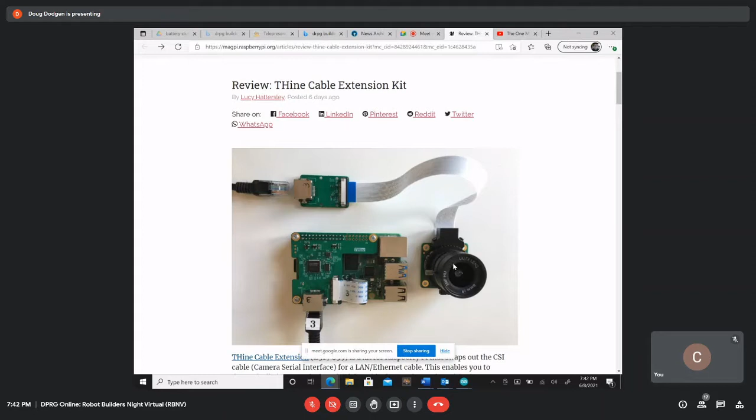I want to show this review of the THine cable extension kit. This is from the Raspberry Pi magazine, and it shows this cable attached to a camera. The whole point of this is that the camera can be 20 meters away from the Pi, in case you have some outdoor setup and don't want to put all the stuff by the camera.

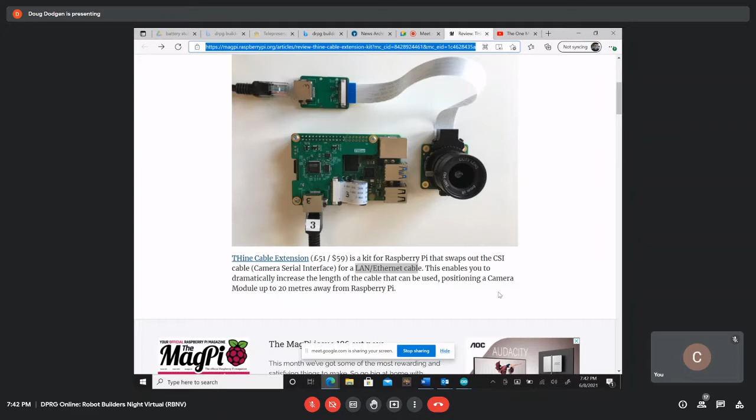Is that a PoE interface? It doesn't say that, it's a THine interface. What they do is have proprietary boards that turn it into a Cat5 network cable for transmission. See this here, LAN cable? That's kind of odd, I haven't heard of that standard. Maybe it's something similar to PoE since it has to provide power, and that camera takes a considerable amount of power. They're not showing an external hookup in the example I looked at, but I thought it might be something you'd want to double check.

THine cable, yeah, I'll post this link in the chat when I finish. All right, thank you, I'll check it out. I've stopped the sharing, I hope. And I'm back again. That just seemed like something you'd be interested in since you have that remote camera application. Yep, I'll look into it.

But the PoE solution I had looked at was not very viable because it runs off 24 volts and generates all sorts of heat. And it's a hat that sits on top of a full-blown Raspberry Pi. So lots of reasons why the PoE solution wasn't viable.

But that might be worth looking into. I don't know, it's like $50-something, and the Pi's about that too, so it's kind of a question of what are you willing to lose. Unfortunately, that project can get expensive depending on how much resolution you need.

And matter of fact, I just bought today, I just bought another camera. Okay, well we'll let you take over shortly and you can talk to us about that if you're willing to go next. Well, there's not really much to show. The camera I bought cost about $85.

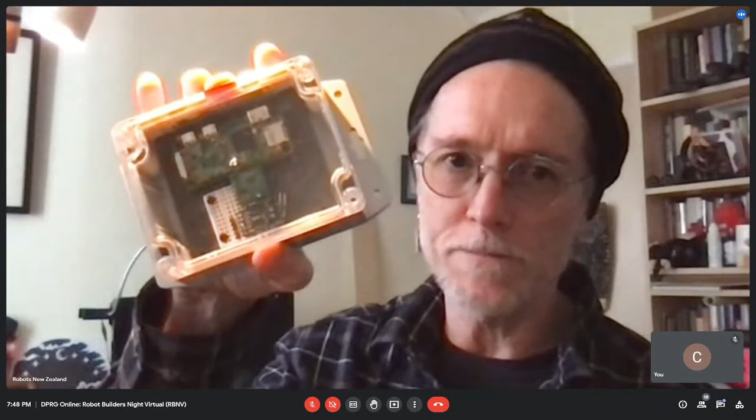Good to know. I was wondering what I was going to put in front of mine. You know, Murray would probably say to me, 'Why are you 3D printing your box? Just buy a metal box with a seal on it, cut holes in it, and be done.' He might. Actually, I was gonna bring this up next because this is the beginning of a post office robot. Or post box robot.

These boxes have an O-ring seal. They're about $20 in New Zealand, so maybe 15 in the US. They have a Lexan top and are entirely waterproof once sealed. I don't know about submerging it a meter under water, but you could hit it with a hose and it wouldn't get wet inside because of the O-ring. I'm rebuilding my post box with this on the inside, aiming down. I've got one of these tiny Pi Zero cameras that will look through the Lexan down into the post box to tell me if I've got mail.

I've also got a PIR sensor. The little black board in there is a 10 amp relay. When anybody walks by the post box, it will turn on the relay, which switches on a 2 meter strip of LED light so my path is lit at night. I'm also putting in one of these little 15 centimeter IR detectors so that if the post box has anything in it, it blocks the light and sends me a message. So basically I'll have Wi-Fi connected, mail detecting, PIR detecting people, light, and a camera to see what mail I have. If it's a bill, I'll just avoid it. So yeah, that's my post box robot project.

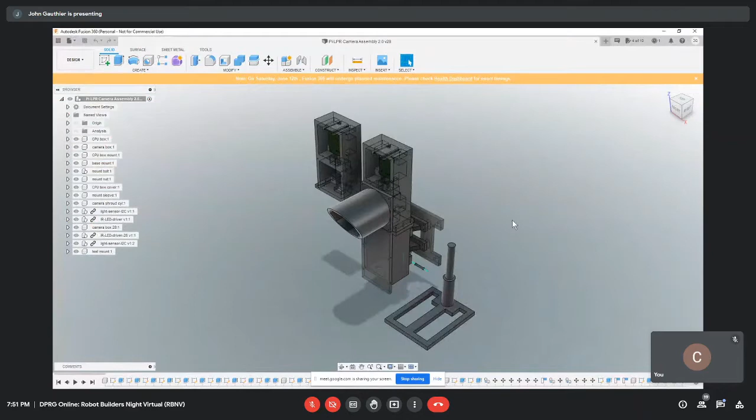What are you thinking, neoprene? I don't know what it is. Anyway, it's this stuff. Do you know what the original purpose of the box was for? They sell them in about 4 different sizes, from half this big up to even bigger. They're just considered project boxes, like you used to get at Radio Shack. I don't know who makes them, but I'm sure if you went around on the internet you could find something, because they're very solid. Really high quality. Considering it's $20, it's really good.

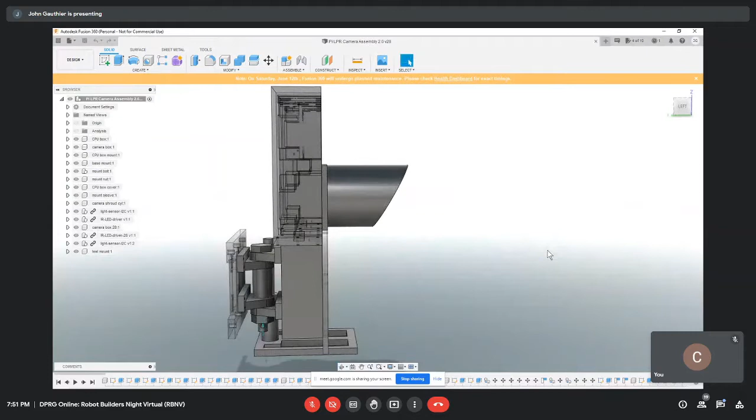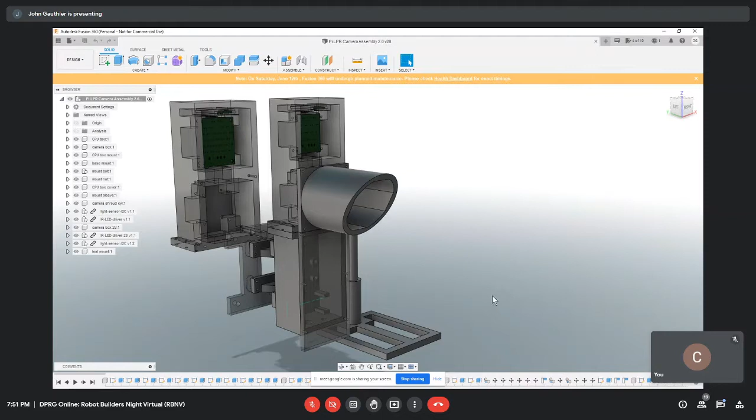Are they plastic or metal? I can't tell. Sorry, they're plastic, with a brass insert in the corner. They're quite strong and reinforced, and have little rails on the inside so you can put PC boards in upright. I screwed mine to 4 little posts on the bottom. They come with or without these flange attachments on the side. And then there's the Lexan, which is quite high quality, so I'm putting my camera through that rather than drilling a hole. The only hole I'll have is a grommet to take the 12-volt power in and the signal back out to the LED strips.

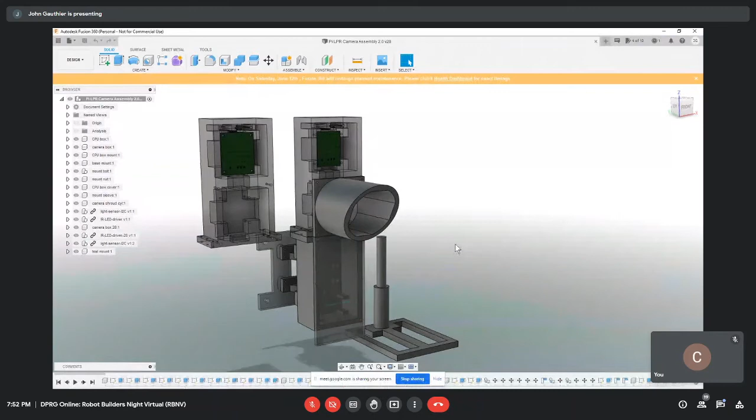So, can you see my screen share? Yes. This is my box. The Raspberry Pi goes down here.

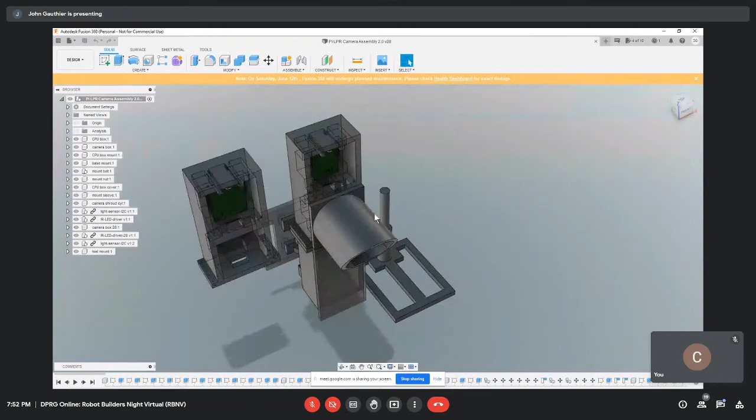Power comes in the bottom. Then I've got a shroud for the camera. The camera goes in the midsection, and then I've got the IR illumination at the top. It used to be that I had a top on here with the infrared and camera that would rotate, but that was just too many seams to have to seal. So I've changed the whole design where it swivels on this pin, mounted where it's attached to the mailbox.

About how big is that? That's about 9 inches tall.

But it will be visible on the street, right? That unit will be visible on the street, under his mailbox. Well, yeah, I mounted it on the side of my mailbox facing down the street.

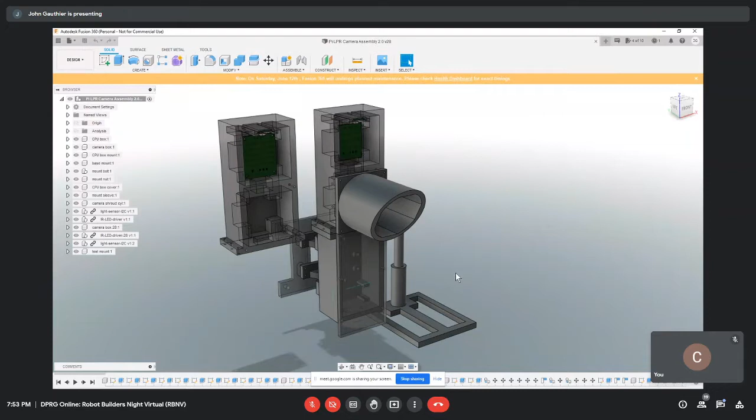Okay, well the only thing I can say is I don't know if you guys followed the news, but there was that one—I think they called it a hitchhiking robot. Did anybody follow that? It was a hitchhiking robot that was left out. It went all over Europe, and it had instructions on it for what to do. You put it on a train or in your car, and you travel it around, and it kept track of where it was. And it traveled all over Europe, and they took it to, I think, Philadelphia, and it was only in Philadelphia for one day, and someone killed it. Some guy stomped on it, broke it.

So the only thing I'm thinking is that if you put that thing out on the street, anybody who notices it will probably destroy it. Well, I've had the prior version out there for probably a couple of months while I've been working on it. And one of the requirements is that I don't put too much money into it, because yes, there is a possibility that someone will just plain destroy it for fun.

So, and also, people are jerks, right? People are jerks, who knew. So I've got a little locking mechanism on the bottom, so nobody can just unscrew the pin to remove it. Even with a screwdriver, I've got the screws that mount it to the mailbox hidden behind the attached box, so even with a screwdriver you couldn't get it loose. I mean, they'd have to put in a lot of effort to steal it.

You printed it with PETG, it's hard to break. The only thing I can suggest is I would make it much less obvious. My little post box robot is entirely hidden—you can't even see it when it's there. So if you can see it, and someone decides to take it or destroy it, they will.

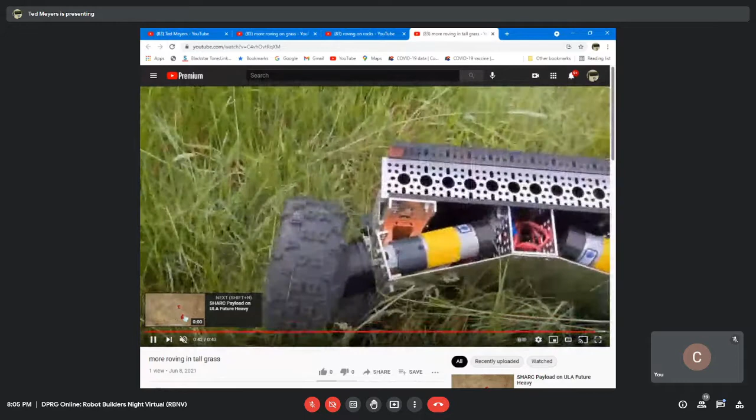It has trouble with grass that's taller than it, but this is what I wanted to show. Like, I asked about gluing the wheels on, or the tires onto the wheels, and this is why it has a problem right there. Yeah, the wheel just basically rolled off.

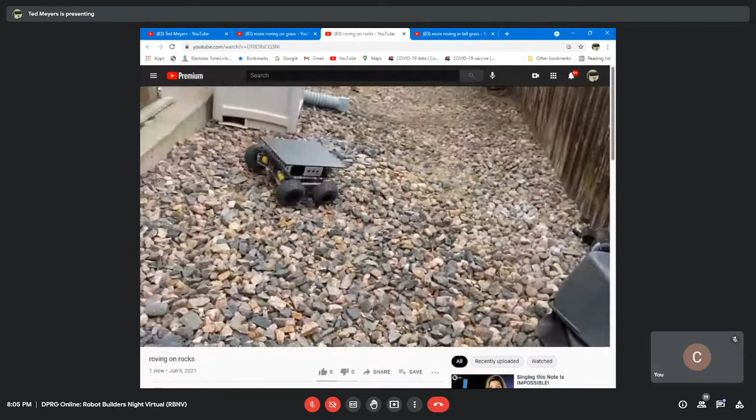So then here I've got it on some rocks, and it goes all right. It has a little trouble tracking straight, and that's also, I think, because it's on a hill. There's a little more of that, but it's not too interesting. Here it is on the grass, so I'm just showing that I'm going fast and it's not tipping over nearly as much.

Part of that is I have the plate on the top that kind of sticks out back, so it acts as a wheelie bar. A couple times it tried to tip over, but kind of got stuck on that and bounced back. But yeah, I'm just going over some sticks and branches I pulled off the tree there.

Sooner or later it'll come back here, and that's maybe a couple inches on that curb, and it just can't quite get up that far, but it's not tipping over backwards at least. And then if I go sideways, it'll go right up over. So that's pretty good, I think I'm happy with the design now.

I just have to hook up the autonomous stuff and put in a bunch of sensors, and I don't know, another month or two, and I might have it ready by August. Let me stop sharing here, but yeah, thanks.

Yeah Ted, that looks great. I think we talked about how the ability to go over obstacles was almost directly related to wheel size, and the only thing you could do is make your wheels bigger, so you just have to accept your limits at some point. It looks pretty powerful, it's got lots of juice, and as long as you don't hit something bigger than the wheels, I think you're all right.

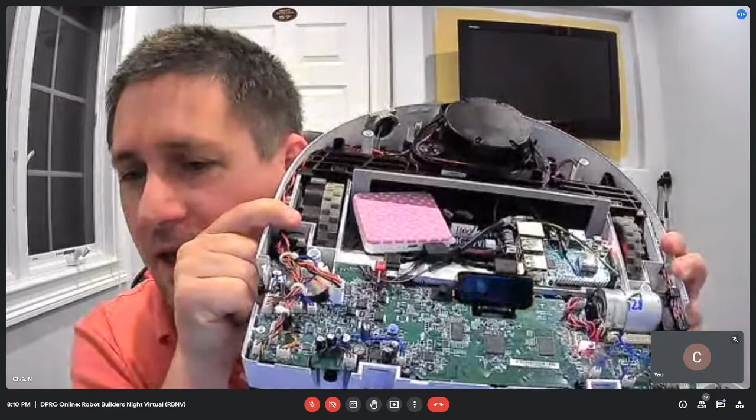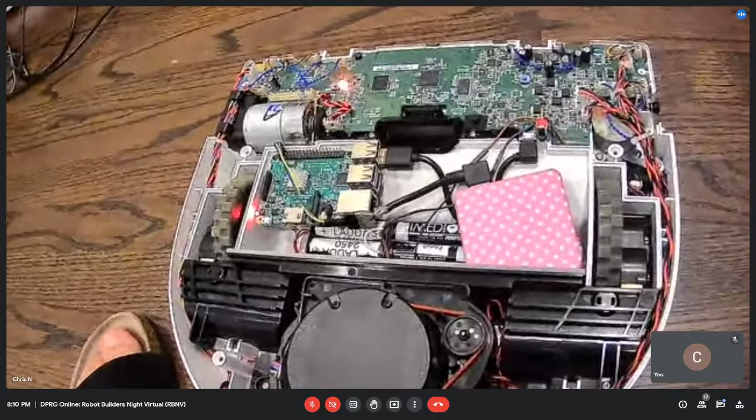So I've been spending some more time with my salvaged Neato that I pulled out of the dumpster. Let me move the camera, it'll be a little easier. I managed to kind of secure the Pi, and you can see the 10 AA's down there and the battery pack, and a little 5-volt supply for the Pi. So this is all tucked into the dustbin right now, not super well secured, but good enough.

Like I mentioned last time, let me move back to share my screen. The controller built into the Neato robot gives you sort of a quote-unquote API. There's this USB link between the Pi and the Neato controller. There's a lot of code out there for various versions of this, and I looked at some of it, and most of it is very straightforward.

I didn't feel the need to reuse any of it, but none of the code I saw out there solved one of the main challenges, which is how you control the motors, because you can't control wheel speed independently. What you have to do to control this thing from Python is create your own API. That API needs to send a command, in this case get motors, which comes back with status information about the motors. It comes back as multiple lines, each containing a value. So you send a command, get back some ASCII text, parse it, and out come values you can use, like the current speed of the motors or the load on the motors.

So yeah, that's what I had - that was really, in the end, the only challenge. So if I stop the sharing and pull this back up, if I start this now, in the end I was semi-happy with the smoothness of it.

The LiDAR also kicks in, so I'll talk about that in a second. I can control it, and with all the other software out there, the only thing you could do is go straight forward, go straight back, and then turn on a dime. That's what everybody else is doing from what I could tell, but I wasn't happy with that. So with this convoluted logic, not sure if it's evident really, but I can sort of turn in an arc, to a degree of satisfaction here.

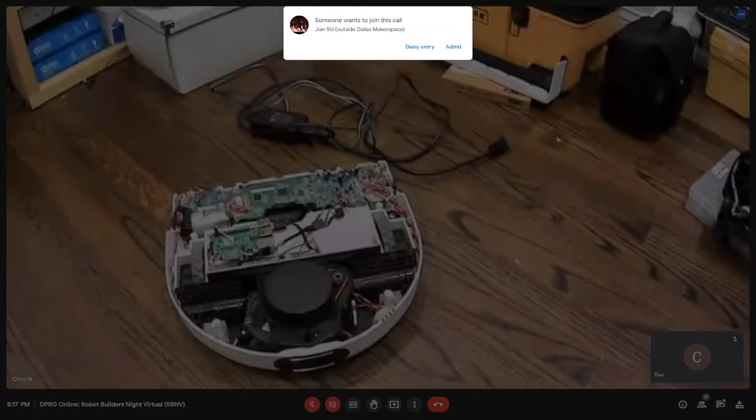So the LiDAR is also going on. I said last time I wasn't sure yet how I'm going to do the LiDAR, given that the serial link is a bit of a bottleneck, but tapping directly into the LiDAR would be less elegant. So I decided to use that serial link as is for the LiDAR, and it just slows things down a little bit.

The main loop ends up running a bit on the slow side because it takes a while to get the LiDAR data out. So I run that main loop probably at around 10 times a second, but I'm not sure if that's fast enough to catch me falling off the stairs or something. I haven't tried that yet, but it's good enough for this sort of just playing around.

But the LiDAR data basically comes out, and right now I have it just split - I'm not looking at the full 360 degrees of what the LiDAR gives me. I'm basically splitting it into 45-degree sections, and I'm just looking at what's the shortest range in each of those 45-degree cones.

And ultimately, that's the number I'm recording. So that comes out to 8 values right now that I'm just printing here. I'm not using it for anything yet. I don't have any actual feedback control going on yet.

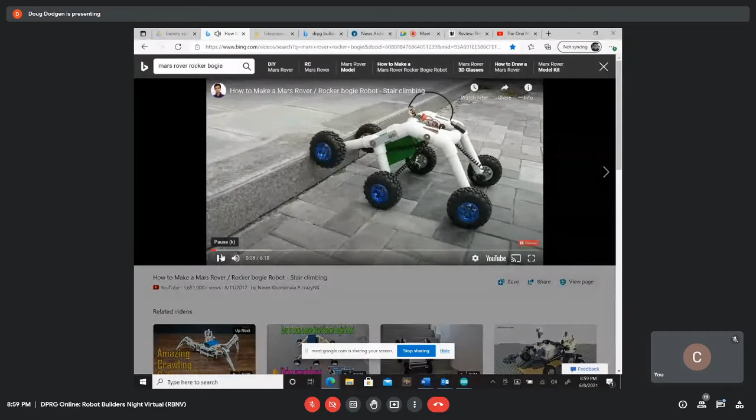Somebody needs to make a sailing robot with a solar panel on it that will deliver to Murray. That PVC pipe, yeah, Mars rover. I want to try it. Oh cool, watch this go up the stairs. Cool, and it's using those standard wheels for the RC cars we get from AliExpress with that hex nut thing in there. That's a pretty elegant solution to a problem there.

Yeah, you can put a soundtrack in there so it'll have a sound system and a mirror ball - get Murray to groove out like that every time you run it. I'm going to slip that into the chat, but I think that'd be kind of cool. I cannot get it done in time for August, but I think it'd be kind of cool to play with. You gotta add a set. It might make a telepresence robot.

I've had chats with people about PVC pipe and stuff, and actually in terms of strength, aluminum channel or those little aluminum box channels are extremely light. They don't cost much and are a lot stronger than PVC. I wonder where I'd get it though. I know where I can get PVC. I can go down to the hardware store here in New Zealand and buy a rectangle of aluminum with maybe 1 mil walls, extremely strong, doesn't bend, and I can get it at my hardware store. You can get it there too, I'm sure.

Yeah, we can get it at Home Depot, Lowe's, Ace Hardware. When you say cheap, how cheap is that aluminum compared to PVC? Well, PVC bends though, and it's quite heavy. So let's say you don't have stringent strength requirements and either will do—what's the price comparison? I don't know exactly, but it's not particularly expensive. A 1 meter section is about $25-30, and you'd maybe need a couple, so maybe $50 worth of aluminum. It's not that much, and it's a lot lighter. That's a big price difference compared to PVC—if you don't need that strength, you can save a lot of money with PVC.

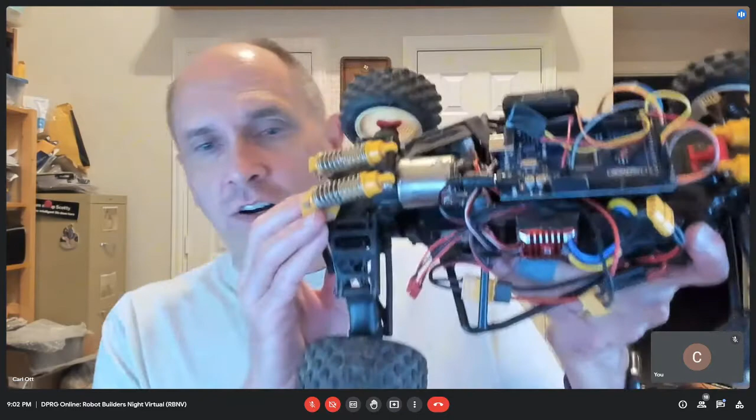I think I'm going to jump in then. I've been working towards Columbus, looking for a cheap and easy way to do it because I don't have much time—turns out I had even less time than I thought, so we'll see. I started with this 10th scale or so outdoor racer that I got from Mr. Anderson.

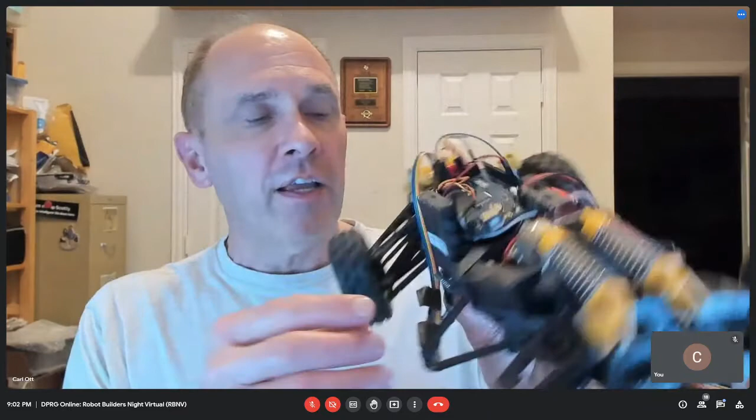I basically took it down to the chassis, motor, suspension, and wheels, put in a new steering servo, and figured out how to get the 4-wheel drive bar reattached. Everything's duct taped on here because I'm in that mode right now. Got a little rock crawler ESC hooked up to an Arduino Mega just to see what the platform is capable of, since I haven't messed with these in years. I used my standard PS2 controller interface since I had the libraries running. The cool thing is I'm able to actually drive this around and it seems to work.

A couple interesting things I found: number one, it's got so little clearance I don't think it's going to make it through grass. So I won't have time to get a hardware platform ready by August, but I'm still trying to see how far I can get just on pavement, up and down a driveway. If I can do that, I'll count it as progress.

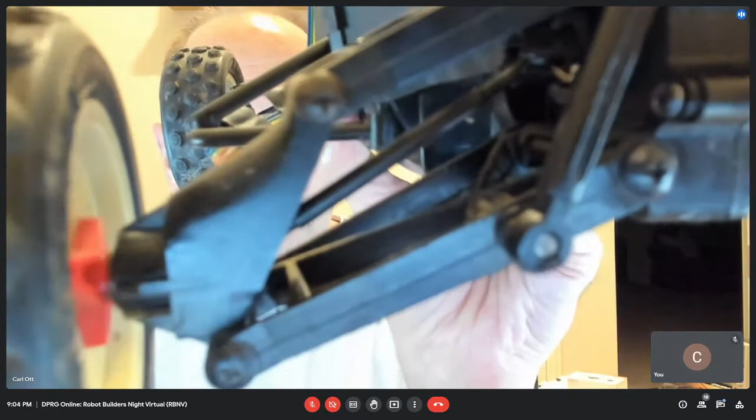The other thing I discovered is that it's kind of old, so it's hard to see in here, but there's a paper clip thing through there. There's a paper clip because the little plastic or metal piece that used to be in this universal joint fell out on the test bench—it broke off. I was seeing how fast the motor spun, and that tire stopped turning because of that. So tin snip and a paper clip, and now it works again.

It all goes back to the point that if you're going to do one of these out in the grass and on different surfaces, you really want to start on a base oriented towards torque, not speed, because this one is much more towards speed, not torque. And you want sufficient wheel clearance. So anyhow, those were useful things that I found.

There was something else I found—oh, I know, on the Arduino I just copied over the same library I've been using on HoverSim and hacked a bunch of stuff away to get started fairly quickly. I discovered this is the first project where I've wanted to use actual servos with PWM to control something, either the speed controller or the servo. I found that the standard hardware library has a resource conflict in the timers with something else I'm using—I don't know which library it was. So I wound up swapping that out for the Adafruit soft servo library, and wouldn't you know it works, but you'd better not use too many console logs because that really screws it up.

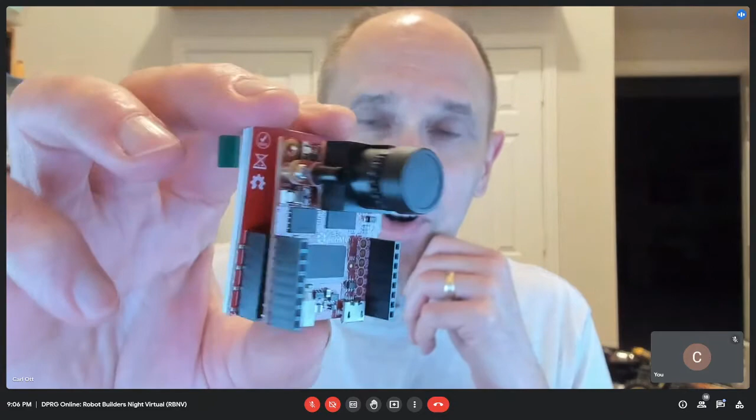The speed controller box makes a perfectly sized test stand, so that's really positive. The other thing is the LCD display for my OpenMV cam came in. I had a soldering party and managed to get it all gussied up. But looking at it, it's a nice little assembly, but it's really not meant to mount anywhere because it's got these two holes in the middle of free space. Anyhow, that's why I call it duct tape and baling wire.

So this will be duct taped on with cardboard or something somewhere. Yeah, they sell a plastic case that you can attach to. It's reasonably priced. A bracket, yeah, I'm with you. Whether it's aluminum or Delrin, Murray, I'm with you. Or 3D printed, or forget the 3D printing when you've got gaffer's tape.

Dude, no, that gaffer's tape is too good for that RC platform, man. I'm telling you now. Okay, you might have a point. But I have a tolerance for slough, but I really don't. I want it to at least make it to the edge of the driveway before falling apart. Just use rubber bands, man, they're stronger than gaffer's tape if you use the right rubber bands. All right, well, that's my update, such as it were.

There's the plastic case for it, which you can buy. I would definitely look on Thingiverse, there's most likely, I'm sure of it, a 3D printed case. Does it hold the display? Can you attach the display to that on the back? Yeah, I can, I just had a 3D printed bracket, I drilled two holes. You know, this white bracket here. There's just two small screws that go through the back of the plastic case, and that's what holds it.

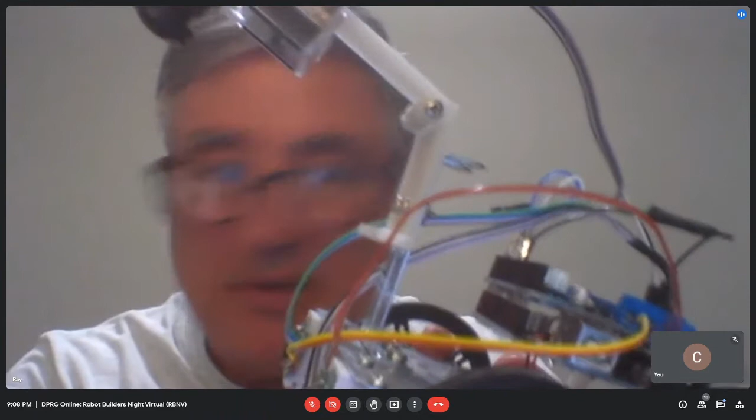I have got a piece of tape over those. Come on, there we go. Yeah. So you can see the two nuts on the back, and I did those at regular intervals because you always want to play around with the height of the camera. So, and that just stood on, I actually have it extended up because I wanted it higher.

It's not an Erector set, it's like a knockoff of an Erector set that I got years ago from Big Lots. They had them on sale, and it works pretty good. Cool. Well, thanks, I'll have to add that to my shop list.

All right, we seem to have flown around the table once or twice in record time. How can we be talked out so soon? All right, well, we'll go once. Oh wait, what? Okay, whoa.

There was a little flurry of messaging on the mailing list, basically me announcing that Pimoroni has finally put on sale the, what's it called, the PAA, anyway, it's the near optical flow sensor, the one that is for robot vacuum cleaners. Kareem and I had a little back and forth about that, and I think they're around 15 pounds or something, I can't remember. They're not cheap, but I'm going to have a blog post posted.

I've got it half written, but I've had a flooded basement and a whole bunch of other stuff going on, so I haven't had a lot of time, but I can highly recommend the investment of at least one of these. Kareem has suggested he's going to, or has, put in an order for them, but I think we all owe it to ourselves to try one.